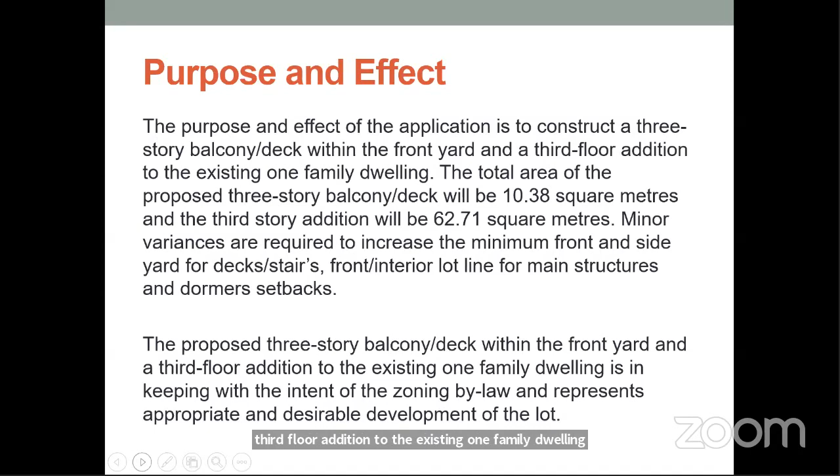All right, so this is a breakdown. There are 6 minor variances here. As the committee read the report, any questions for these 6? So basically they're for the porch. The porch needs a setback for the front yard for above 1.2 meters and the steps, and then an interior lot line setback. The third story addition needs front yard setback, interior lot line setback, and dormer setbacks. Okay, next slide. No questions.

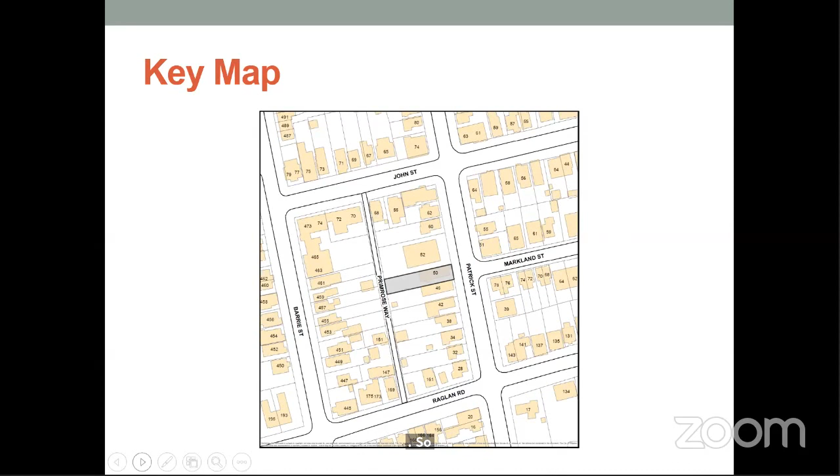So 50 Patrick Street is located between John Street and Raglan Road, as you can see from the key map. Next slide, please. So this is a site plan provided by the applicant. You can see the 3rd-story addition, along with the proposed 3-story balcony at the front. Again, all the minor variances are listed on the other slide. Next slide, please.

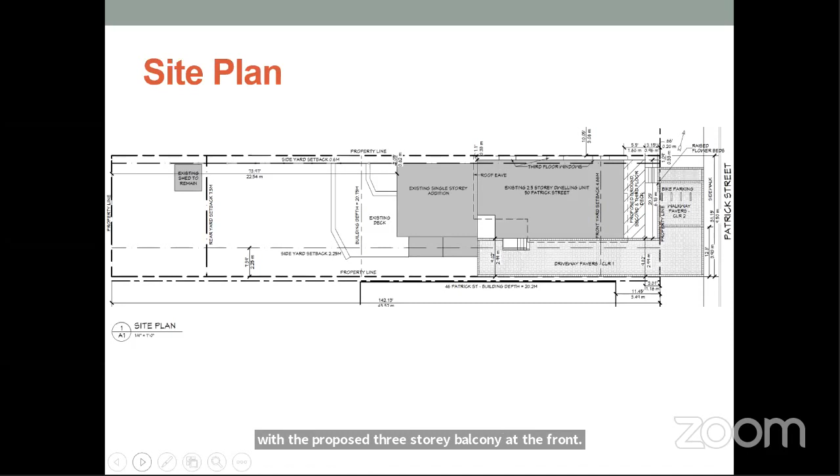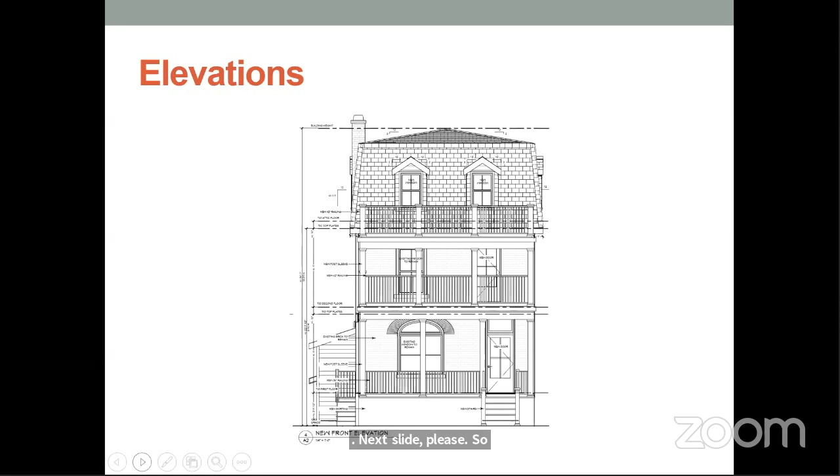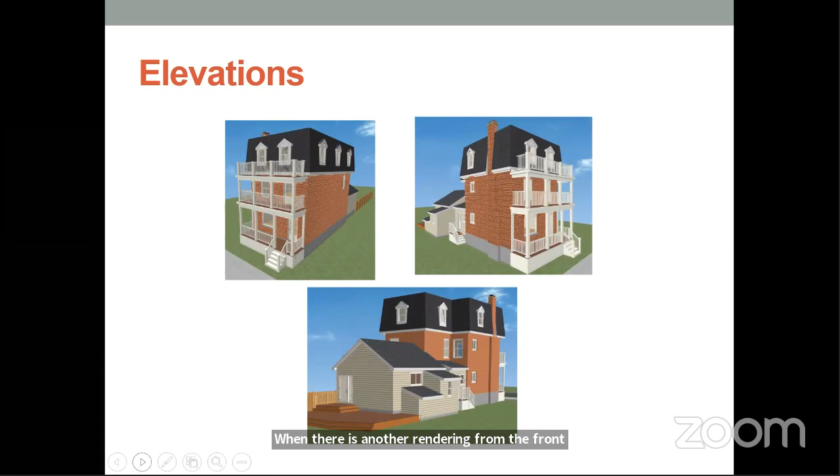So this is a front elevation drawing, showing the 3-story balcony and deck, and the 3rd-story addition with the dormer windows on the front. Next slide, please. There's another rendering from the front, from the north side, south side, and the west side. Next slide, please.

Requested variances maintain the general intent and purpose of both the City of Kingston zoning official plan and zoning bylaw 8499. The proposal is desirable for the appropriate development or use of the land. The structures and requested variances are minor in nature. As such, the proposed application meets all 4 tests under subsection 45(1) of the Planning Act, and the application is being recommended for approval. Approval will allow for the construction of a 3-story balcony deck within the front yard and a 3rd-floor addition to the existing 1-family dwelling. That's the end of the presentation.

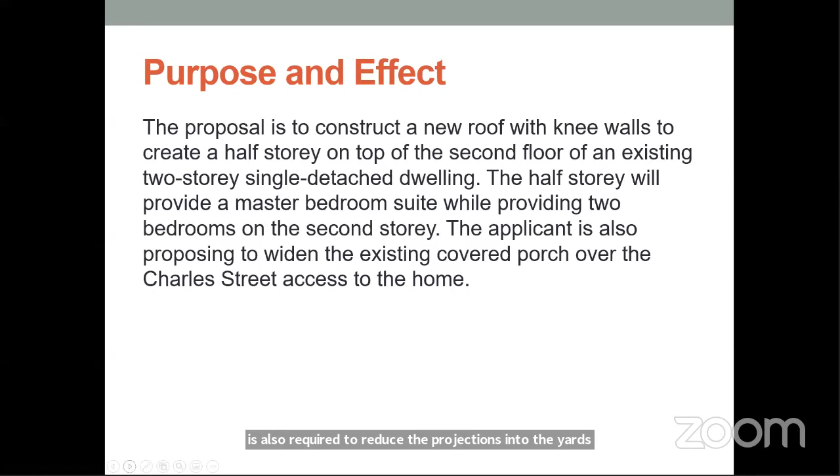So we are looking at 5 variances here. The first variance, minimum front yard along Rideau Street: the requirement is 2.2 meters, they're proposing 2 meters. The second variance is the minimum front yard along Charles Street: the requirement is 1.27 meters, and they're proposing 0.87.

The maximum percentage of lot coverage for this property is 33.3%. Because they are actually widening the front porches, the percentage is going up, so they are proposing 50%. However, the existing right now is only 49%, so it's actually only going to go up 1%. We have to base it on the maximum percentage in the bylaw, so it may look like a large number, but in essence it's only 1%.

The fourth variance, minimum percentage of landscape open space: again, because the front porches are widening, it's taking away from the landscape open space, so it's only a small percentage change. However, we have to base it on the minimum requirement, which is 30%, and they're requesting 24%. And again, for the covered porches, the projections into yards, the current porches already project; however, the additions are going to project just a little more, so we need to recognize that. 3.5 meters is the requirement, and they're reducing it down to 0.86 meters.

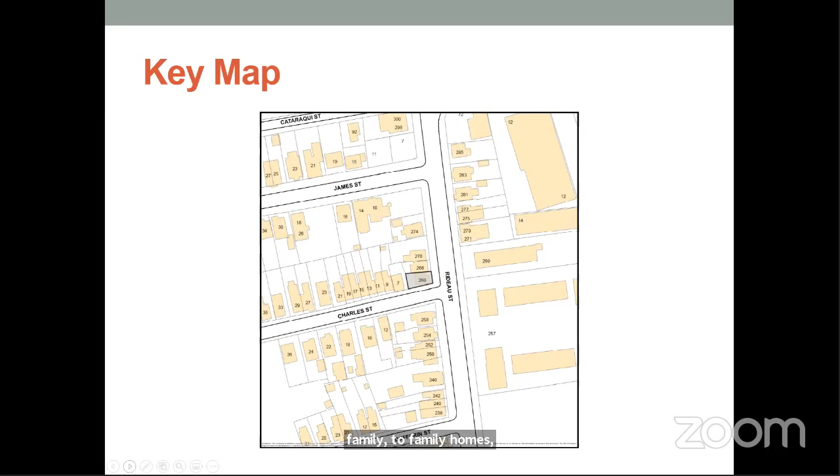Along Charles Street, the porch itself — you'll see it in the next photograph — is not centered with the door. So what they want to do is widen it slightly in order to have it look symmetrical to the door.

And it would also give a little more space for the owners. The additional floor space is an interesting situation. It's a smaller home with 3 bedrooms currently on the second floor. What they're going to do is remove 1 bedroom and make that into the stairway leading up into the master bedroom, which will now be located in the proposed half story.

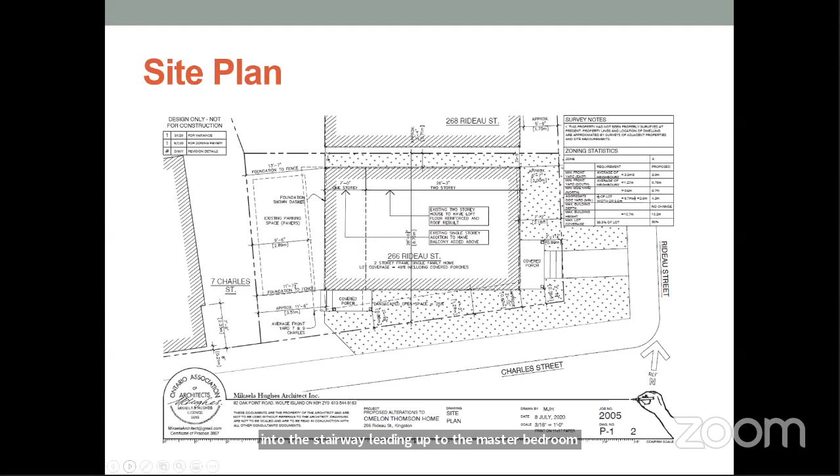Next slide. So here we could see the second floor plan. You can see the first 2 bedrooms, the bathroom, and what was a bedroom is now being converted into the stairway going upstairs.

And then the loft itself, as you can see, they're not putting in dormer windows. They're actually putting in a skylight type of window to allow natural light into the room. But it's just going to be a large master suite.

So in this case, they are asking for variances in order to allow the building to be built on the existing footprint. It's kind of a funny situation. However, because the existing building encroaches into the front yard setbacks, we have to look at the addition. In other words, the loft would have to comply with today's setbacks, regardless of where the existing house is located. That's why the variances are required, regardless of them building on the existing footprint and just going up.

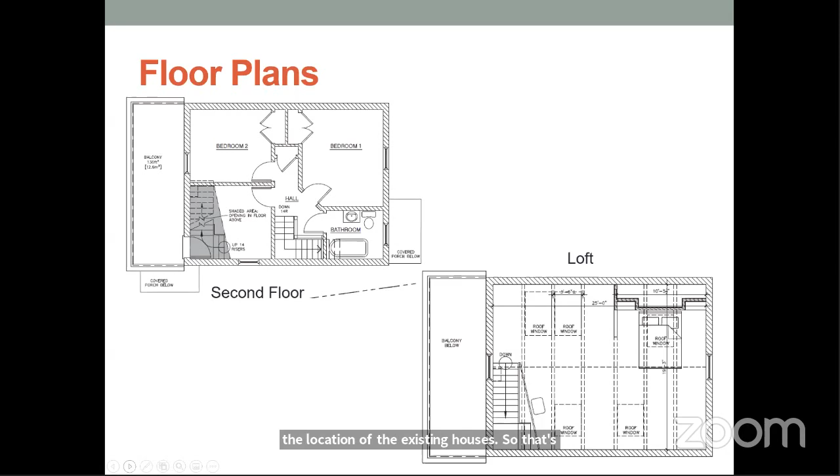Next slide. We can see here that their proposal actually complies with the height requirement of the zone. The elevation on the right would be the elevation along Charles Street. You can see the expansion indicated by the dotted line, and to the right of it would be the expansion. So what they're doing is just making the front porch a tad wider here.

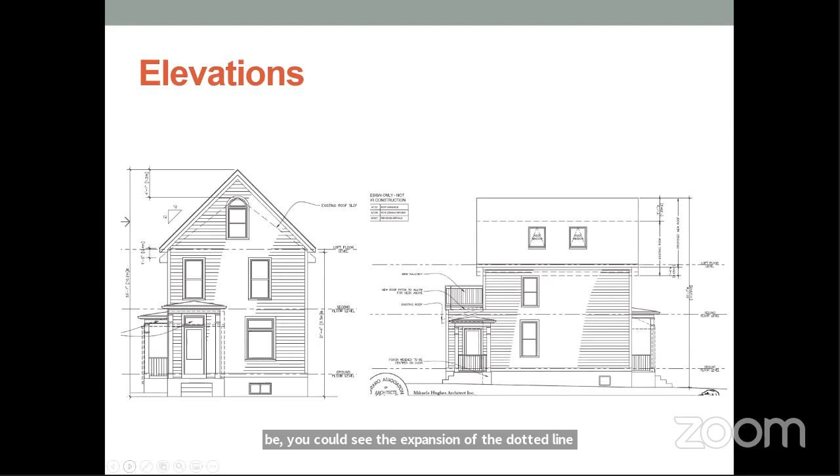Next slide here. So our recommendation: the requested variances are consistent with the general purpose and general intent of both the City of Kingston official plan and zoning bylaw. The variances meet all 4 tests under the Planning Act, and as such, the application is being recommended for approval, subject to the proposed conditions in Schedule A.

Approval of this application will allow for the construction of the half-story addition on top of the existing 2-story single detached dwelling on the subject property, and the expansion of the covered porch. The proposed development is not anticipated to have any adverse impacts on the abutting residential properties. I leave this in your hands, Mr. Chair. Very good, thanks very much, Tim.

Could I ask the applicant or their agent to please identify themselves by name and address for the record? Yes, Mr. Chair, my name is Christopher Omelon. I'm the applicant of 266 Rideau Street, and I'm here with my representative, Mikaela Hughes.

Anything further either of you would like to add to the application we have before us this evening? We have nothing further at this point.

Very good. All right, so I'll turn it over to the committee and ask the committee members: do you have any questions for the applicant, their agent, or staff? Please raise your hand. Jordan?

Yes, my question could be for staff or it could be for you, Mr. Chair. It's simply a matter of — I recognize there are 5 sort of different individual requests here for variances. Now, they seem to be appropriate for the development, they seem to maintain the zoning bylaw, and they seem to maintain the official plan. I'm just wondering, in anyone's experience here, when we get these applications with a number of variances — and I appreciate that minor is not a mathematical calculation — but do we ever find that something moves from the minor to the major, given the number of variances?

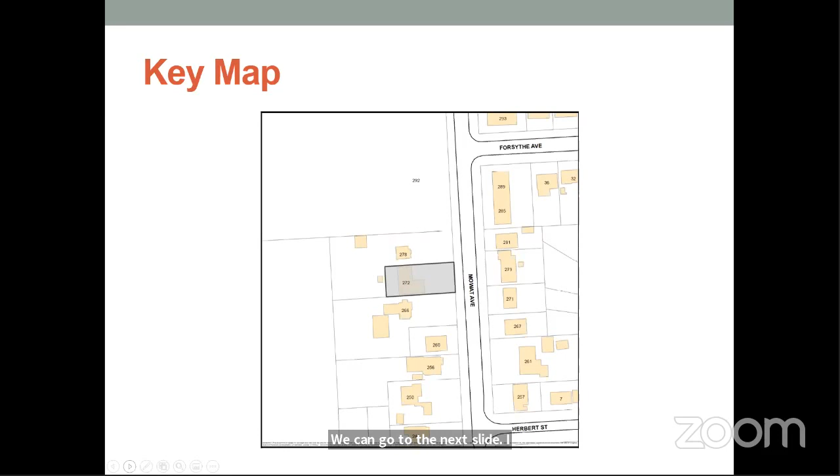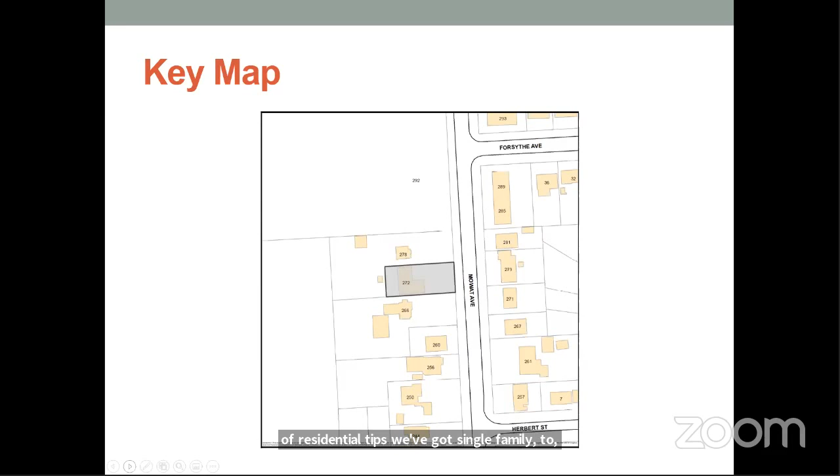So as you can see, the subject property is on the west side of Mowat Avenue between Forsythe Avenue and Herbert Street, and it is surrounded by a mix of residential types. We've got single family, two family, multiple family, and I believe there is one low rise walk-up apartment building just down the road as well.

Next slide. So as you can see on the left, the site plan shows the existing situation: the 2-car garage and the house attached into the back. On the right, they're looking at rebuilding the garage virtually on the exact same footprint, and the hashed marks show where the addition is going to go.

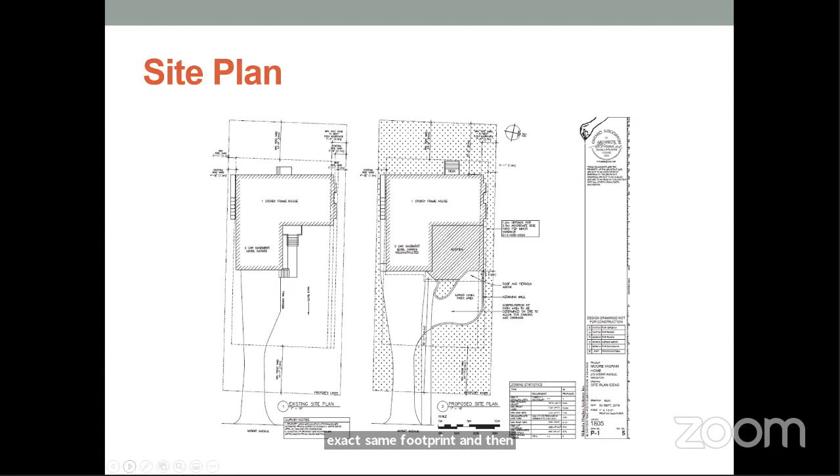So how they're going to have it set up, we can go to the next slide and I can show you. As you can see, the second residential unit is actually going to be located in the basement, or what would look like the basement. It would have its own access, with a kitchen, living room, dining room, bedrooms, and a rec room. Then there's a stairway in the middle of the house that will take you upstairs to the principal unit.

And there you can see we have a study, dining room, living room. So virtually upstairs is staying the same. The only thing being added is a study and a large roof deck, which would provide outdoor privacy amenity area for the upper unit.

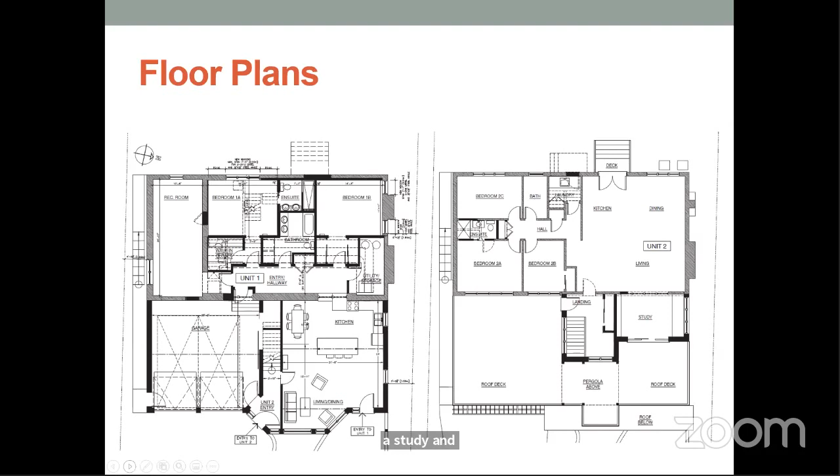Next slide, please. And here it shows the concept of the elevations. Now it is interesting, because the elevation here is higher in the back versus the front. So instead of having what we'd typically see as a walkout basement facing the back of the house, we actually have a walkout basement that faces the front. So that's why it appears to be a 2-story house from the front, but it's actually not — you're actually seeing the basement in the first floor.

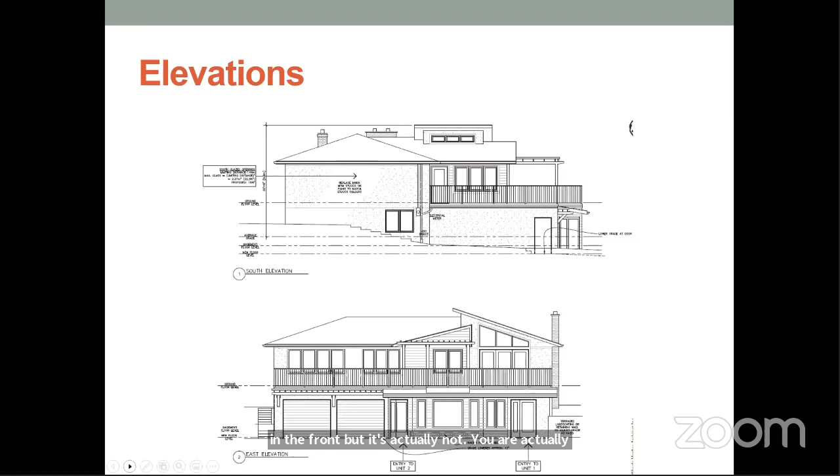Next slide. So again, the requested variance maintains the general intent of both the City of Kingston official plan and zoning bylaw 8499. The proposal is desirable and appropriate for this type of development. The building or structure and the requested variance is minor in nature. As such, the proposed application meets all 4 tests under subsection 45(1) of the Planning Act, and the application is being recommended for approval. The approval will allow them to provide an addition, rebuild the garage that's there, and overall allow them to have the second dwelling unit.

Also, just to let you know, we have not heard anything from the public. We have not received anything in writing. And I guess I will leave this in your hands.

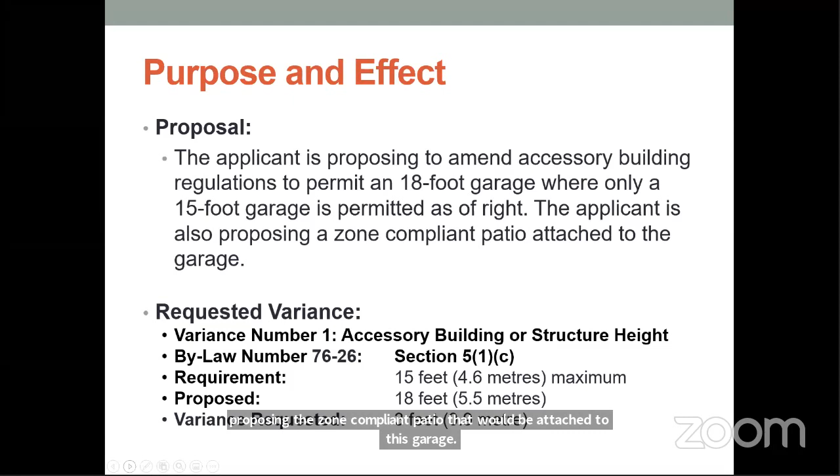As you can see on the map here, the property is in a rural area and it is near the border of the city limits here in Kingston, right off Battersea Road as well, on a local street known as Patterson Road.

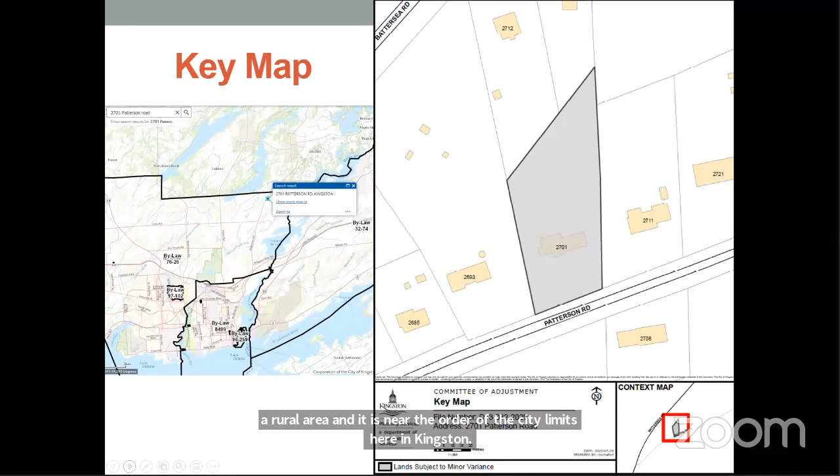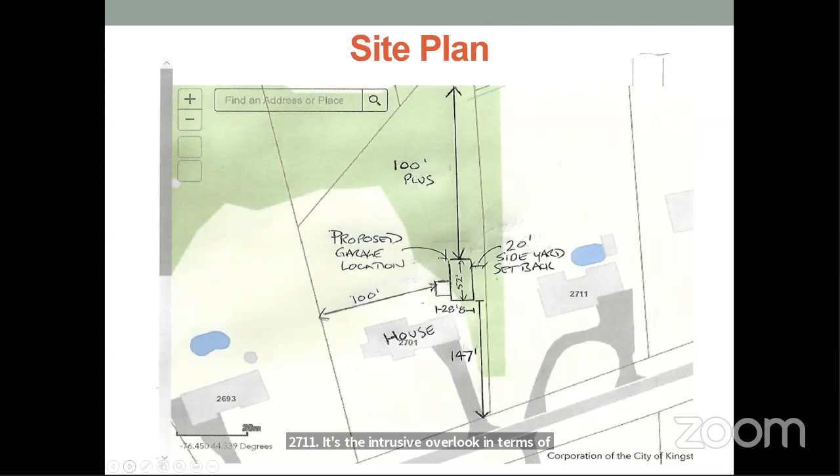This is the site or plot plan that was provided by the applicant, and it denotes the setbacks from the other properties nearby. In particular, the one to focus on is the 20-foot setback from 2711, as that would be the highest potential for intrusive overlook, in terms of having a building that would be perceived from another property that wouldn't necessarily be permitted as of right. In this case, it would be the 3-foot increase.

So this is the proposed garage here, and there are a couple things I wanted to point out. In particular, if you look at the right elevation, which is the central top image, there are no windows proposed on the side facing closest to the applicant's neighbor. So the place with the 20-foot setback would have no windows, meaning no increase in potential look into a private rear yard of the neighbor.

In addition to that, there's a patio that, if you look at the image to the left at the top part, is actually being covered by the garage itself. So despite more activity happening in terms of having your neighbor having people over, the sound and potentially the visual overlook will be mitigated by the addition of the garage as well. And when looking at the windows on the left elevation, those windows are facing back onto the applicant's own property.

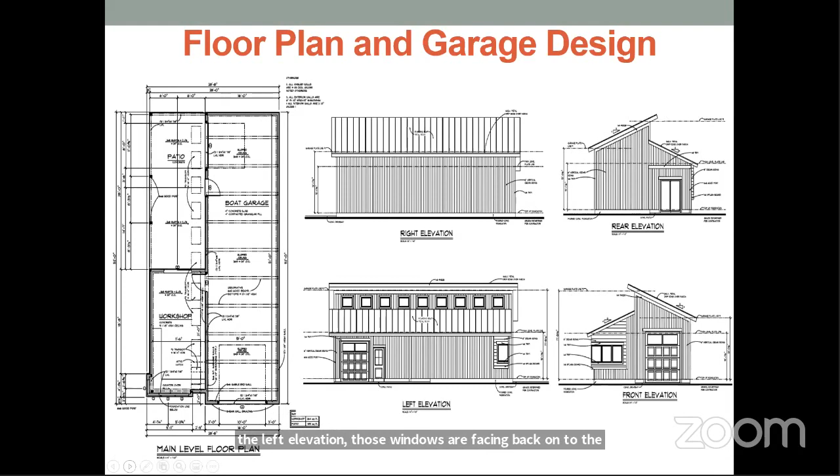My recommendation here is to approve this based on the fact that it is maintaining the general intent and purpose of the City of Kingston official plan and zoning bylaw 7626. The proposal is desirable for the appropriate development or use of land, building or structure, and the requested variance is minor in nature. As such, the proposed application meets all 4 tests under section 45(1) of the Planning Act, and the application is recommended for approval subject to proposed conditions. The effect would essentially allow this garage to go 3 feet higher than the 15-foot regulation, being 18 feet in height. The next slide shows the proposed conditions. That's all for me, everybody. Thank you very much. Very good.

Thanks for the presentation. At this point, can I please call on the applicant and or their agent to identify themselves by name and address, please? Mr. Chair, the applicant notified us late this afternoon that they are still out of Kingston on business, but they had nothing additional to add and they would like their application to proceed.

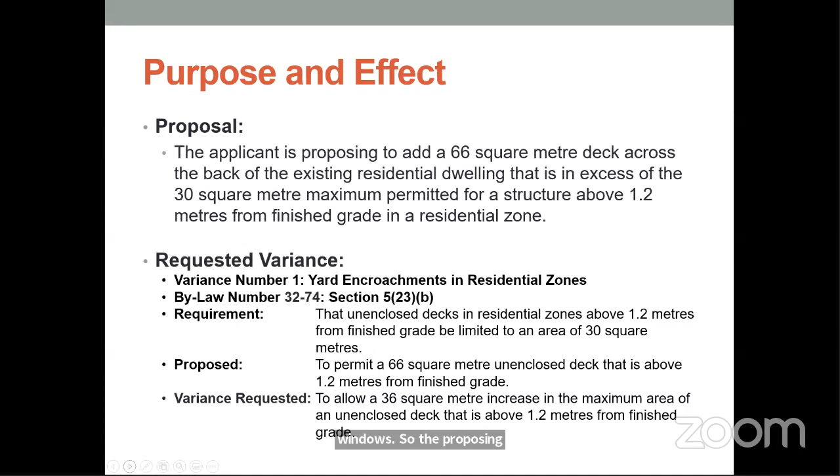Next slide, please. So as we can see here, this is located in the eastern part of Kingston, or former Pittsburgh Township, and is located in a subdivision that is being built out still.

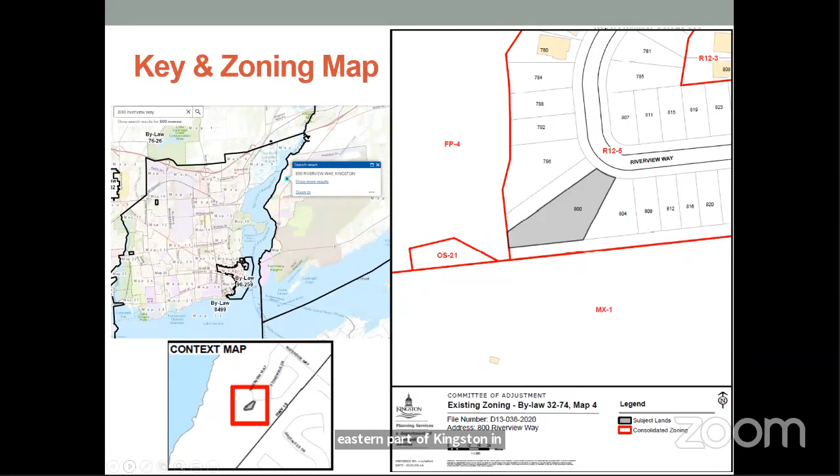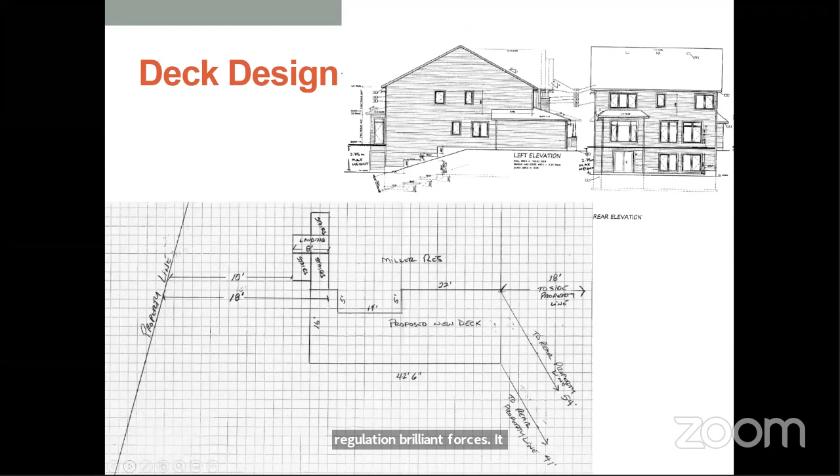Next slide, please. So when looking at the top image here, it shows that similar to Mr. Fisher's application, the elevation changes. The purpose and intent of this regulation really focuses on, or assumes, that everything is on the same grade. However, if this deck of the same size was proposed in the front yard, we wouldn't be having this variance discussion because that would be permitted as of right for that area. However, because the rear yard is above 1.2 meters from finished grade, in fact well above 1.2 meters, that regulation kicks in, which is why we have to vary this regulation.

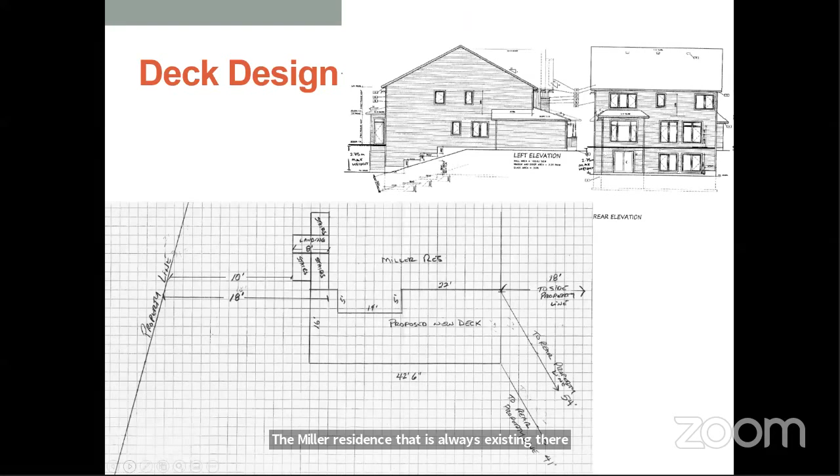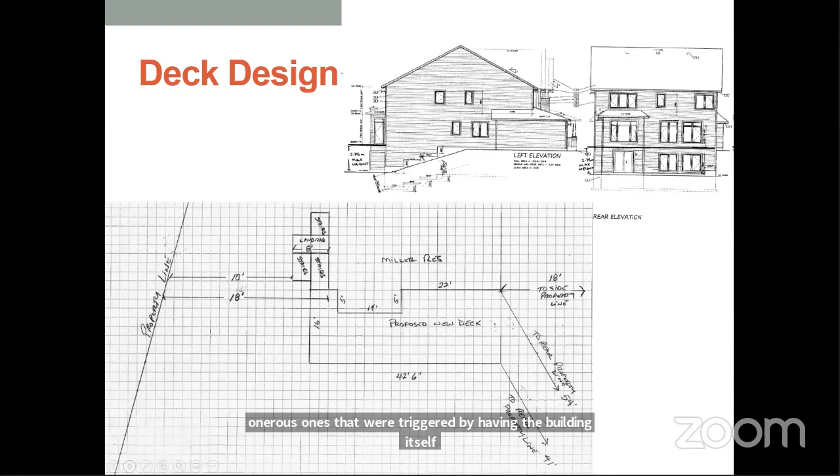If you look below, that is the proposed new deck. The Miller residence that's already existing is over there, and it would be something else to note when looking at the deck are the generous property line boundaries from the edge of the deck to the property lines to the east and west. Those are both in excess of what the bylaw would require for the property itself, even if it was more onerous ones triggered by having the building itself use those setbacks, which kicks in once again when it's above 1.2 meters from finished grade to reduce the potential for intrusive overlook.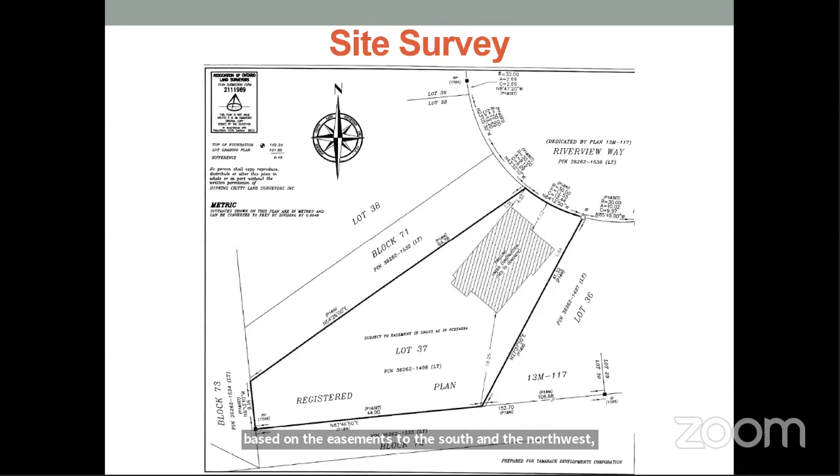I've got to say, Mr. Prell, my next question was going to be about what Block 71 is and whether that's a pathway, so you read my mind, sir. You've confirmed everything for me. Thank you. Oh wow, well thank you, Jordan. Thanks for that.

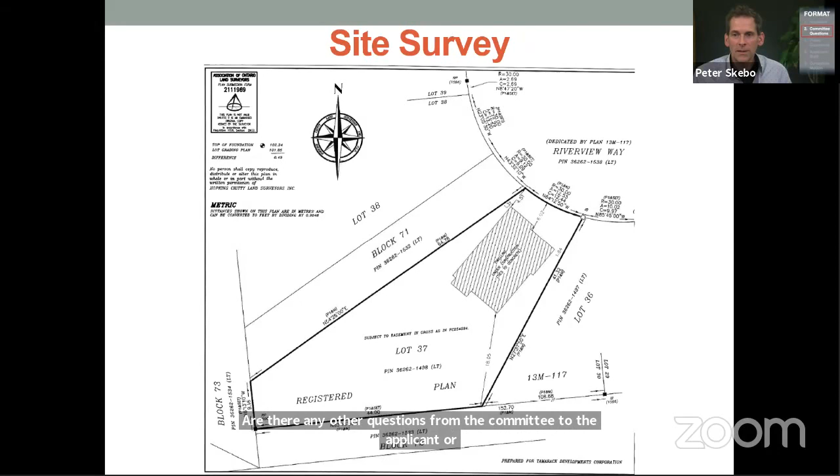Thank you. Through you, Mr. Chair, I just wanted to make a clarification on something Mr. Prell just said. He may not have been aware.

There actually is a rezoning and official plan amendment, as well as a plan of subdivision application on the quarry lands located to the south of this existing subdivision. So just to clarify, as a point of clarification, the elevation of the existing dwelling on 800 Riverview is probably about 40 meters above grade, where those, if it is even approved because it still hasn't gotten to that point, potential future residential units would be located. So I would concur with Mr. Prell that it would not provide any issues of overview, but I just wanted to clarify that there is an active subdivision, OP, and zoning application on the quarry land site.

Great, thanks very much for that clarification, that's very good. Okay, so at the public portion of the meeting now, are there any members of the public, or is there anybody in the room who wishes to speak to the application for minor variance for 800 Riverview Way? Please raise your virtual hand in Zoom. I'm not seeing anybody, but in the meantime I'll just confirm with Mr. Prell that there are no members of the public who are in the gallery this evening. That is correct, I have received no notices to speak tonight. Okay, so I'll close the public portion of the meeting and turn it back to the committee for a motion please.

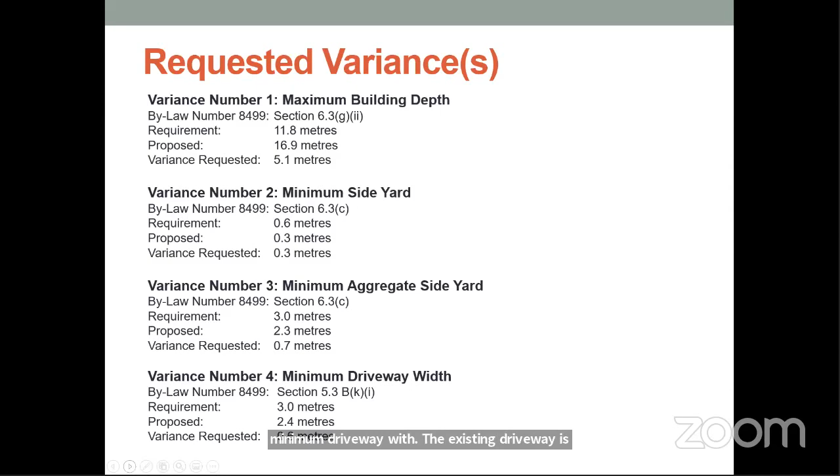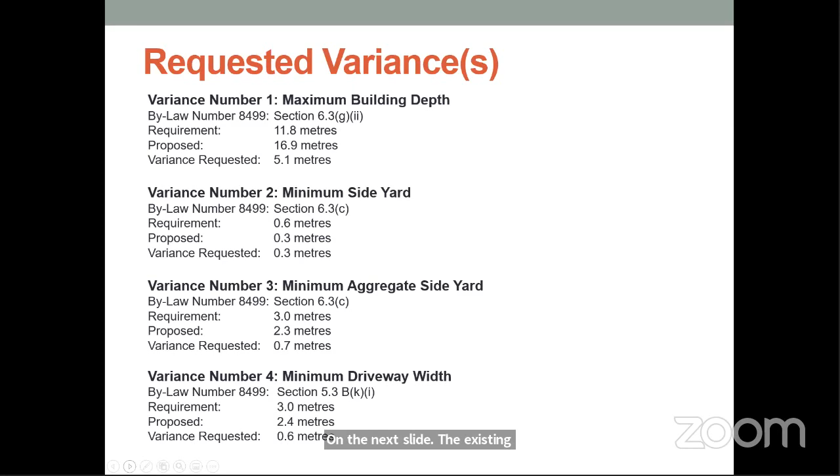The last variance is for a reduction in the minimum driveway width. The existing driveway is subject to an easement, which grants shared access between 444 and 440 to the south, and it extends from the front lot line almost to the rear wall of the existing dwelling. This will be shown on the site plan on the next slide. The existing building is 2.4 meters from the southern lot line, and it's not possible to accommodate a 3-meter wide driveway wholly on the 444 Victoria Street property. The applicant has requested this variance as an alternative to extending the length of the existing easement.

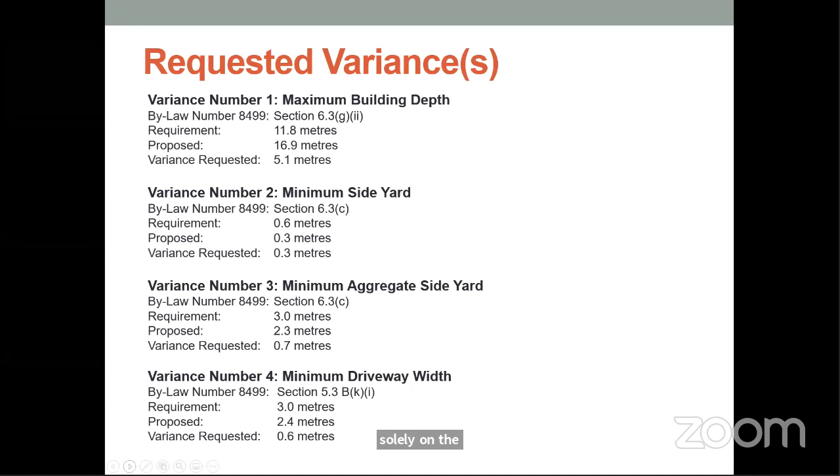So if we go to the next slide here, this is the site plan. It demonstrates all of the required variances. The proposed new depth, the new construction, is shown in the area with the diagonal lines, and the easement and driveway is to the south of the property.

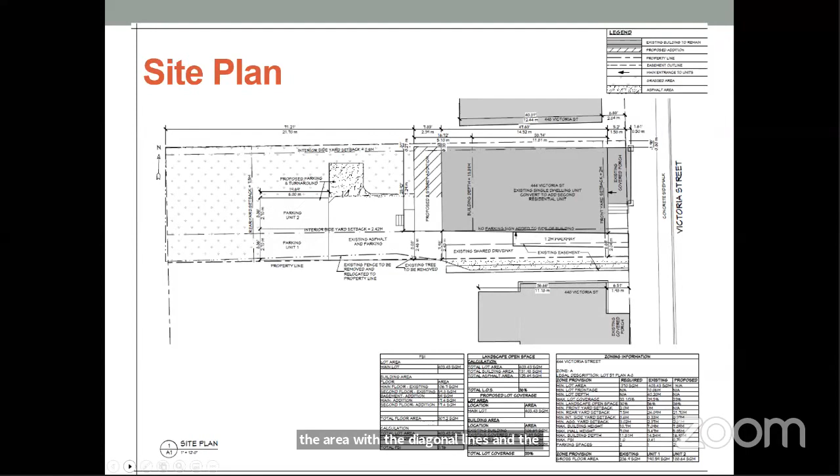Next slide please. Here we have the floor plans and elevations for the proposed structure. The rear unit is proposed to contain 6 bedrooms, and the front unit is proposed to contain 5 bedrooms, so we'll have a total of 11 bedrooms on this site with this proposal. The height is proposed to increase from the existing 1.5 stories to 2 stories. The proposed height complies with the zoning bylaw. We'll move to the next slide.

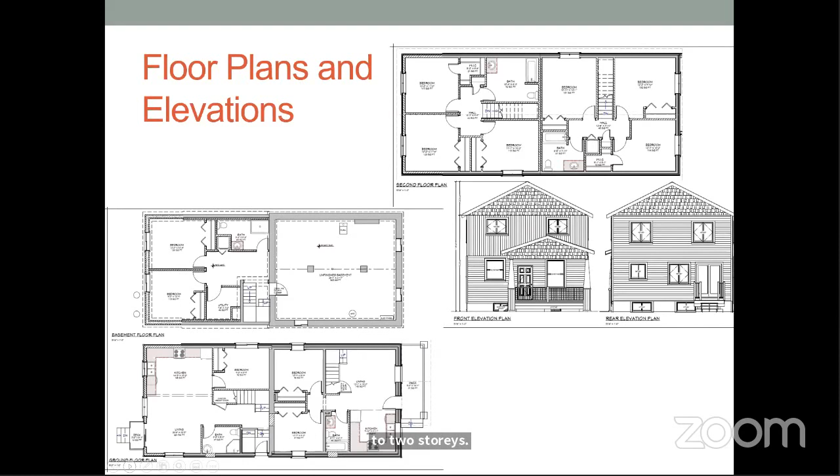We are recommending approval of this application for minor variance. Approval will permit the construction of an addition to accommodate a second residential unit. I'll turn it back to you, Mr. Chair. Great, thanks very much for that, Lindsay. All right, so can I ask the applicant or their agent to identify themselves by name and address for the record please?

And Mr. Tao, I see you're raising your hand.

Mark Tao again from IBI Group, representing the owner in terms of planning applications. The applicant's agent, Heather Sorrell, is also available to answer questions, and she was the designer as well. So, committee members, I'll turn it over to you. Do you have any questions for the applicant, their agent, or staff?

And Vincent? You're on mute, Vincent. There you go. So that's a lot of bedrooms to add in a small area. I was wondering, what is the purpose of adding these bedrooms? Is it for student housing, or doesn't look like it'll be for family housing? Can that be clarified?

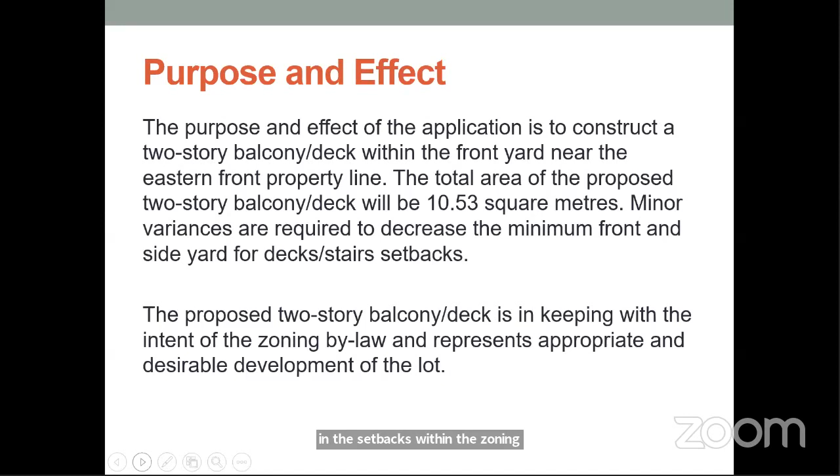Next slide, please. So the type of variances being requested: one is for the deck itself, due to the fact that it's 1.2 meters above grade, they are proposing 3.4 meters from the property line. Variance 2 would be for the steps, proposing 1.72 meters from the property line. Next slide, please.

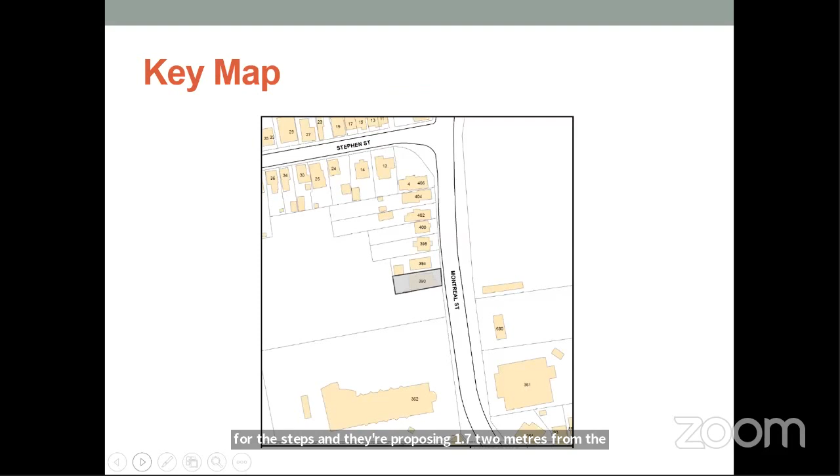So this is the key map where it's located. It's between Stephen Street along Montreal Street, and just south of it is the City of Kingston building, I believe it's Family Services. Next slide, please.

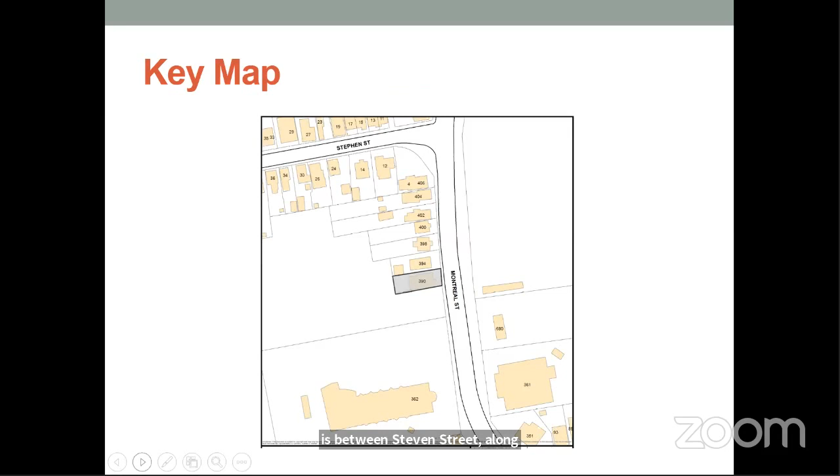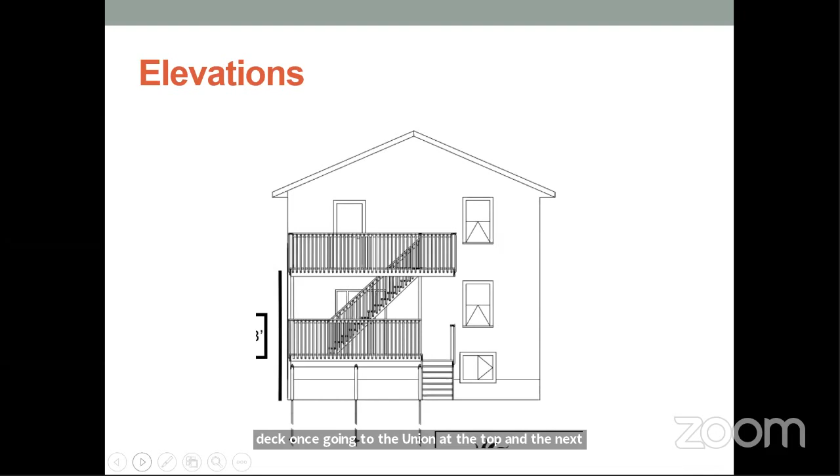So it's a 2-story deck. One's going to the top unit, and the next one is to the main unit at the bottom. This would be facing out towards Montreal Street as well. Next slide, please.

Recommendation: the requested variance maintains the general intent and purpose of both the City of Kingston official plan and zoning bylaw 8499. The proposal is desirable for the appropriate development of use of the land. Building and structures requested variances are minor in nature. As such, the proposed application meets all 4 tests of subsection 45 of the Planning Act. We recommend approval for this application.

And it's important to note, we have not received any public input on this application yet.